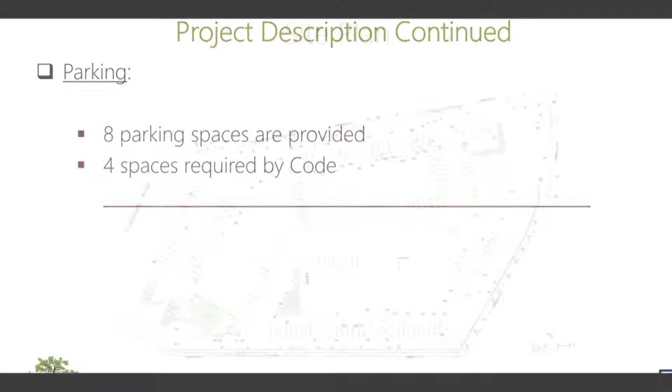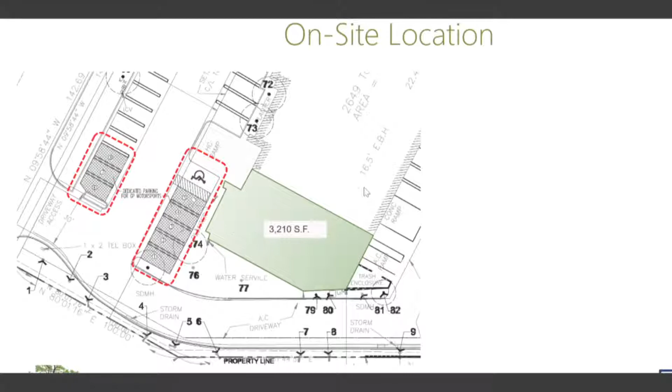Here is a view of the site plan, and this would be their building right here. Here's a closer location on site — you see the building, the tenant space, along with the 8 parking spaces. Here's a tenant floor plan.

So this is a special use permit for the wholesaling of auto sales, storage, including ancillary retail sales, as mentioned. It does require Planning Commission approval in the M1 zone. Generally, the Planning Commission must determine that the proposed use is not in conflict with surrounding properties and uses.

Planning Commission, your role is to basically make the 5 findings as follows: the project is consistent with the Thousand Oaks General Plan; the project complies with all applicable laws, regulations, and policies, including the Thousand Oaks Municipal Code; the project will not be detrimental to public health, safety, or general welfare; the project has been reviewed in conformance with CEQA; and the proposed use at the proposed location will be compatible with the land uses in the nearby vicinity.

In order to evaluate, I want to mention that the project site is zoned M1, industrial park, which allows for automobile storage and sales, subject to the approval of a special use permit. The proposal meets and will comply with all applicable laws, regulations, and policies, including the Thousand Oaks Municipal Code, as part of this and the building permit process if it's allowed to go through.

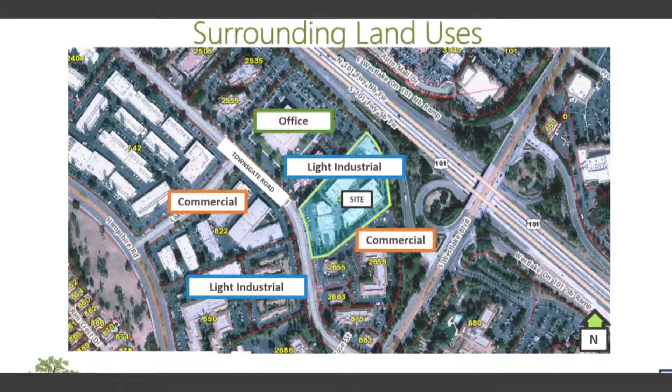Recommendation is as follows: staff recommends the Planning Commission approve SUP 2020-70685 based on the findings and subject to the suggested conditions contained in the attached resolution. That concludes the presentation.

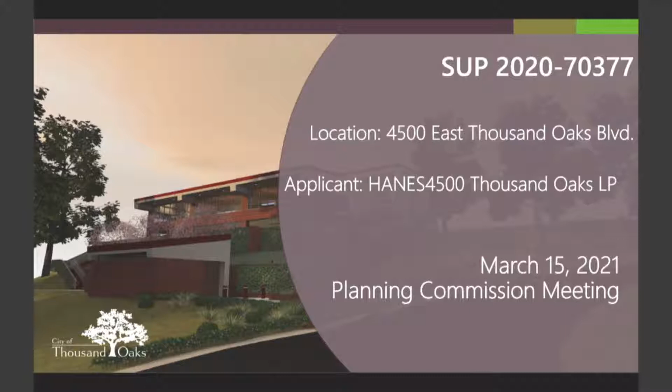Thank you, Chair Buss, members of the Planning Commission, members of the public. So the project is for a special use permit located at 4500 East Thousand Oaks Boulevard. It's in order to construct a new 2-story, 10,000 square foot office building that'll encroach into slopes of 25% or greater. As staff had already mentioned, the project also includes the land division to divide a single existing lot into 2 different lots, remove 1 protected oak tree, relocate 1 protected oak tree, encroach into the protected zone, and allow the pruning of 9 different oak trees, as well as new retaining walls, the associated parking for the development, grading, hardscaping, and landscaping. This project is coming before the Planning Commission for 3 different reasons. One, it's office uses. They are allowed within the M1 zone. However, they are subject to approval of a special use permit by the Planning Commission.

The project is proposing grading within natural sloping terrain that has 25% or greater gradients. And the final one is the project is proposing to remove a non-exempt oak tree that has a diameter of 24 inches or greater.

So here you can actually see the site. The project is about halfway between Thousand Oaks Boulevard and Lakeview Canyon Drive along Via Merida. Here you can see this is the existing site, currently developed with an existing single-story office building with a shared driveway and parking lot.

And here you can kind of see this is the project site, again, with some of the surrounding uses. Of note is that this project site, existing is an office building, and it is surrounded entirely by other office buildings to the north, south, east, and west. Also, this site is part of a larger office industrial complex, which goes up to East Thousand Oaks Boulevard.

So everything that you can see up here, this is all part of a larger office park that was approved in 1988 by the Planning Commission. So as part of that '88 approval, the Planning Commission approved removal of oak trees, encroachments into oak trees, pruning of oak trees, as well as encroachments into slopes of 25% or greater gradient.

Additionally, the applicant in 2020 submitted a pre-application for the project. And then in July of the same year, the applicant submitted the current project that's before you.

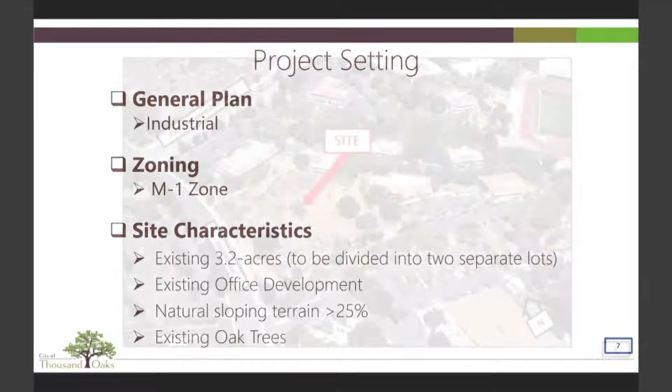And here you can see the site in its greater context with an oblique view. The existing parcel is approximately right here with that building. You can see the existing office development with Thousand Oaks Boulevard over here and Lakeview Canyon Drive just off the screen.

Going into the project details a little bit more in depth, this project is a new 10,000 square foot two-story building. It's a podium-style building with parking on the bottom floor, with the actual office space located directly above it. The parking level is going to have 40 vehicle parking spaces, and the building itself is going to be 35 feet tall.

There is going to be encroachment into 25% slopes or greater, not only for the building, but also for a new pedestrian pathway that'll connect from Via Merida to the existing building and beyond. I'll be able to show you that pedestrian pathway soon. There's also going to be a detached trash enclosure, which has been reviewed and approved by the trash hauler, and other associated landscaping, hardscaping, retaining walls, and utilities associated with that development.

The third application for this project is for a land division, in order to divide that existing 3.2 acre lot into two legal lots. This project, proposed tonight, is going to be on parcel 8B, the smaller of the two parcels, and it's the one closest to Via Merida.

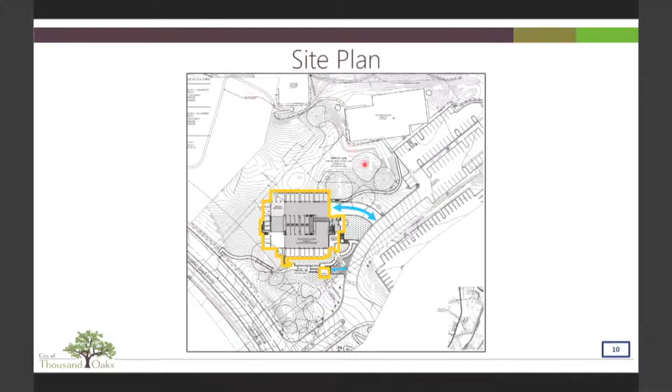In terms of the slope, the proposed project is going to be encroaching into gradients of 25% or greater of the proposed parcel area. Over 35,000 square feet of grading will have to occur - that's going to be the area itself. Of that graded area, just over 16,000 square feet is going to be within locations that have a slope of 25% or more. So less than half of the area is going to have slopes of 25%.

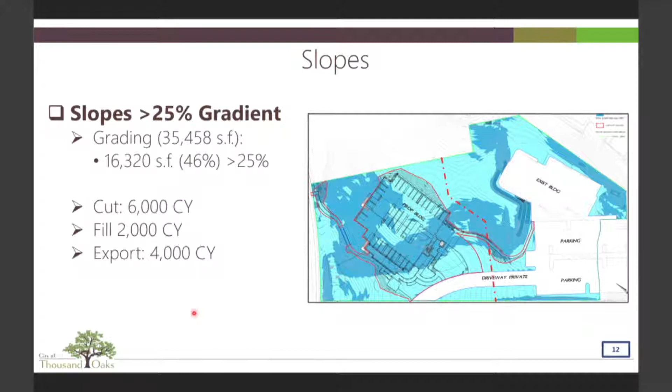Now, looking at this project and comparing it to the city's grading ordinance, since it is encroaching into those 25% slopes, staff was looking at whether there are ways to potentially minimize those encroachments. However, after reviewing the plans, reviewing the site characteristics, and in conversations with the applicant team, it does appear that the project was designed to minimize the amount of grading within those slopes of 25% or more. That is because of where the location is - it's in order to help also preserve the existing mature oak trees that are on the site itself, because if you were to locate it in other locations of the site, it'd be impacting more oak trees.

Additionally, that building is integrated into the slope. So effectively, they're taking kind of a cookie cutter, putting it down into the slope and carving it out. So they're trying to limit the amount of grading across the rest of the site.

The building itself is not visible from Thousand Oaks Boulevard because there's going to be some natural terrain features directly to the north of it that are going to be shielding it. And then you're also going to have other existing oak trees from the south that are going to be blocking it that way. And then also all the manufactured slopes that are proposed, they're at a maximum gradient of a 2-to-1 gradient - that is what's allowed per the city's grading ordinance.

Additionally, just looking at this project site, it's not identified as a prominent landform or ridgeline as identified in the city's conservation element or any of the updates from there. Also, it's not part of a larger existing or even proposed open space system according to the open space element. That's really because this kind of hill area within this office complex is isolated - there's no opportunities for it to actually connect to that larger open space network. There's pure urban development to the north, south, east, and west of this location.

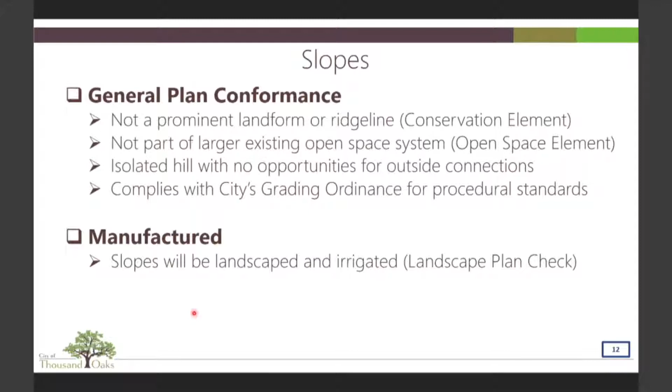Additionally, the project does comply with the city's grading ordinance in terms of those procedural standards. Also, the manufactured slopes are required to be landscaped and irrigated according to the city's grading ordinance. And all of that will also be checked not only during the city's public works review of the grading permit, but also during the landscape plan check.

In terms of the protected trees, there are 28 existing oak trees on site. That's not counting the other non-protected trees.

Originally, in the applicant's oak tree report, they identified 3 oak trees that are going to be removed. After reviewing it and having a conversation with the city arborist, it was identified that only one protected oak tree qualifies to go before the city, that's number 2707. Only one oak tree triggers a planning commission review. It has a diameter of 24 inches, and the city arborist found it was warranted to remove that tree because it is in declining health. It had a health grade of D, appearance of D, and they identified extensive dieback due to twig and leaf failure.

There's also one oak tree that's going to be transplanted, which you can see here down in purple next to the proposed trash enclosure. It's about 2 inches in diameter, so it does meet the city's threshold for an ordinance, but it's of a size that the city's consultant arborist identified it could potentially be successfully transplanted elsewhere on the site. So staff did get that confirmation.

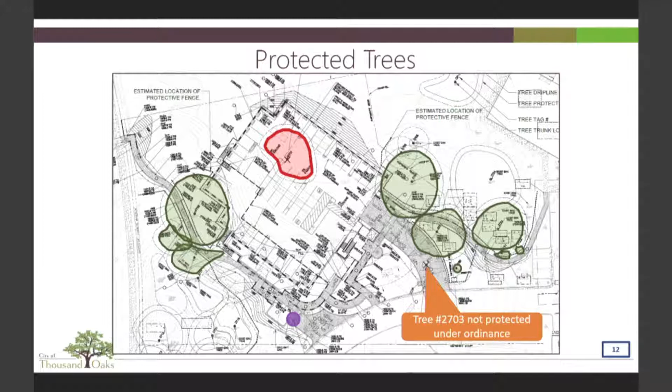Then that third tree I mentioned, it's number 2703. It's in the middle of the vehicle driveway. It's not of a size that it would actually be protected by the city's oak tree ordinance itself. It's smaller than that, so the city wouldn't even have say over that particular tree.

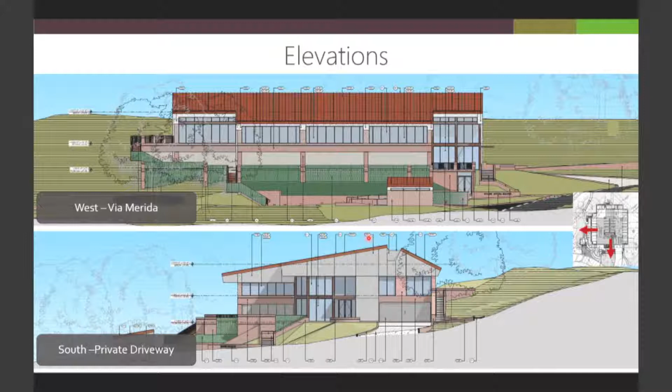Now, moving on to the actual building itself. Here we have the elevation, these are just the strict drawings. The top two are the most prominent locations and elevations you would be seeing, from Via Merida and the southern view, which is that private driveway. As you can see in the parking area, this is the parking level, and here's the podium with the office space built on top of that. The parking itself is going to be screened from view by landscape screens installed along the building itself.

Then we have the other two elevations. Really of note for this east elevation, this one faces into that existing building on the site. You're not going to see this down here, it's actually a concrete wall with earth on the other side, but it's just drawn this way. The bottom one is what's facing the existing elevation and hill to the north, and the other office park.

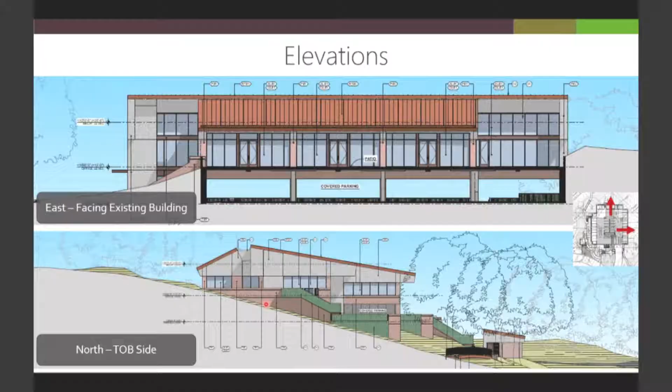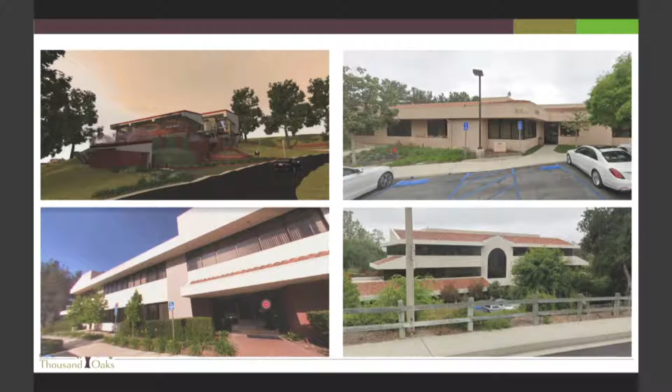In terms of the architectural design, the proposed structure does pull a lot of influence from the existing uses and buildings on site. The current office park has 1, 2, and 3-story buildings. This building fits the character of the greater office park because there are slight variations in architectural style throughout, but they all have a cohesive look. This project takes some of those cohesive elements but still modernizes them.

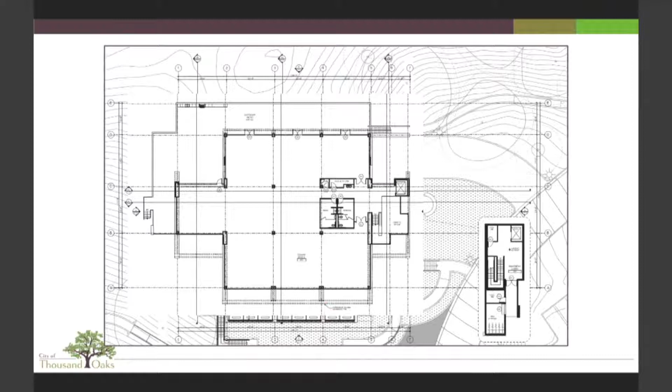In terms of the parking, the proposed project will only require 34 parking spaces per code. However, the applicant is proposing to install 40 parking spaces with that bicycle room.

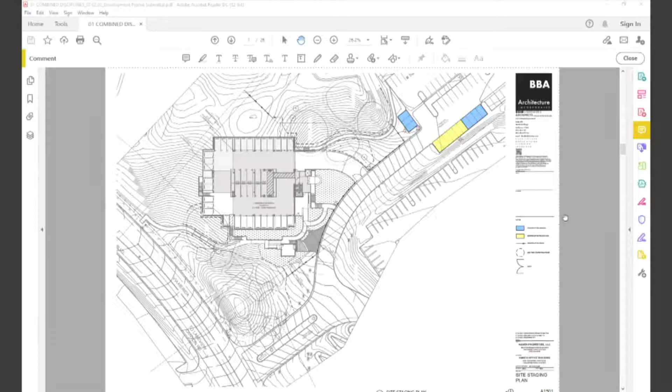This is a very preliminary staging plan for construction, identifying off-site parking as well. We do expect there's going to be some staging on site as they're doing the construction, grading activities, and other construction. But in terms of other parking or materials, this is the start for this project as it's submitted to Public Works, Building and Safety, and Planning for review. As Senior Planner Carlos mentioned, that's something we do take a look at. It's part of the submittal requirement, what the greater construction staging area is going to be for this project. So at the preliminary stages, this does suffice. It's really just to get the applicant to understand we're in a constrained area, and what the initial preliminary construction staging is going to look like. Then we can address that further as they're reviewing the project against codes and fully understanding the full extent of area needed for construction staging.

Okay, I didn't realize these are off-site. So these are essentially set-asides off-site. Effectively, and I say off-site only because this parcel will eventually be split in two, which is why we're doing the land division. Right now they'd be considered on-site since it's one parcel. But if the Planning Commission were to approve the land division and it were recorded with the county tomorrow, it would technically be off-site, but still within that greater office park. One thing that allows that is the office park has reciprocal agreements between the different property owners.

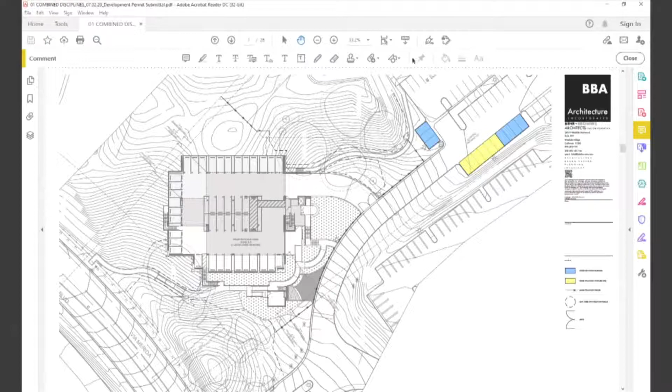My final question is regarding the bike storage room. In the plans, it appears there's storage for 5 bikes. The question is whether there's any set requirement for the number of bike parking spaces in new office construction projects. The city ordinance does not technically require bicycle parking. We use a rule of thumb of 10% of the parking spaces being provided. In this case they're providing 40 spaces, so that would require four bicycle parking spaces. They're providing 5 additional ones.

We do have Kathy Nome, a transportation engineer from Public Works. She'll be able to expand a little more on the bicycle parking requirements. But just so you're aware, the California Green Building Code does have a bicycle parking requirement, I believe 10% of all provided parking. You have to have bicycle parking equivalent to 10% of all provided parking, so it depends in that case. I'll defer to Kathy on the design of it.

Good evening, this is Kathy Nome, Commissioner Newman. I don't have a lot more to add except that we're really excited about how they're adding bicycle parking. They have a designated area, it looks like it's covered. As bicycle parking goes, you couldn't ask for a whole lot more. So we're really happy with what they're providing, and they're following the Green Building Code and the general rule of thumb, so we're good with it.

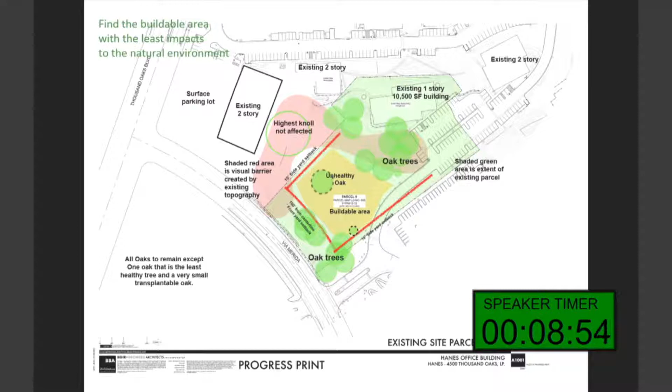The design of the building is pretty unique in that it literally fits into the hillside. We did that to accomplish something: to develop a building that uses sustainable principles and accommodates passive and active energy conservation strategies. So this building is designed to be an energy efficient building. There was a comment about the building being 20,000 square feet, but actually the parking is surface parking and the building sits above it. The yellow area is the office building, and what we did is we wanted to minimize the footprint of the development. By putting the office on top of the parking, we were able to do that.

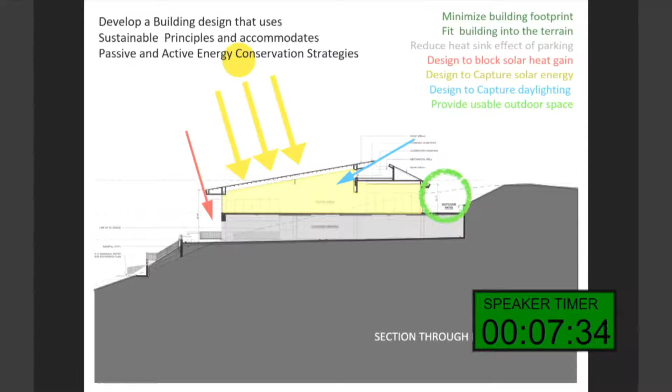We wanted to fit the building into the terrain. Because most of the parking is covered, we eliminate a lot of that heat sink effect that happens when you have parking lots exposed directly to the sun. We designed big overhangs so that we could block the heat gain into the building. We designed a roof that is a very shallow slope roof that allows us to capture solar energy. Even though we're not pointed directly south, we're still going to capture most of the day sunlight. We also designed a clerestory that will come into the hallway of the project, and we have north-facing glass that would also allow daylighting to come into the project. We wanted to make sure there was a lot of usable outdoor space. Next slide.

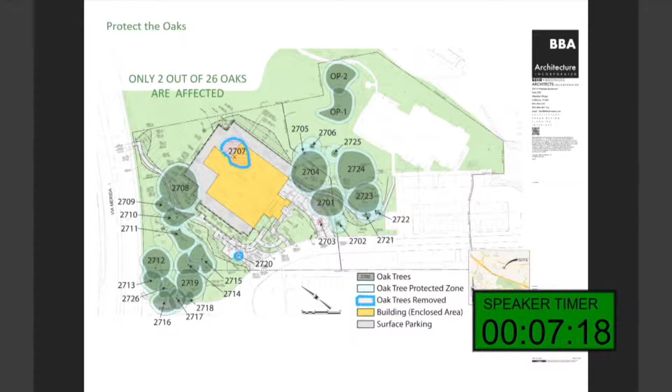So this exhibit is similar to the city, but I want to make clear the yellow area is actually the footprint of the office building up above. The gray is the footprint of the parking. The area directly behind the building is a patio. The two oak trees impacted are the large oak tree and the very small oak tree towards the front. The rest of the trees on the property are completely left outside of that.

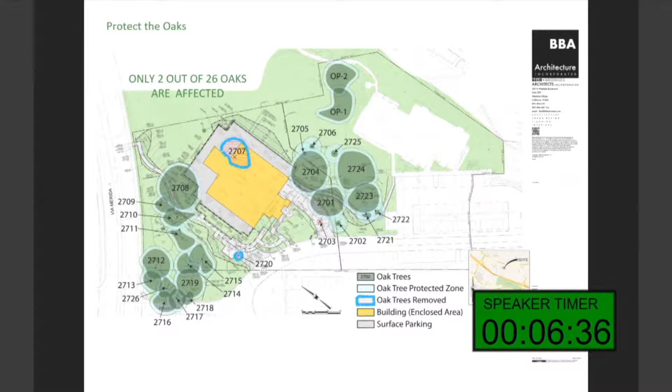With regards to the walkways, one thing we did was grade the elevation of the walkway so we're minimizing the amount we have to carve in, building it up where we can because the distance is so short, adding soil rather than digging a hole, trying to eliminate retaining walls there. That was the whole strategy. When we go under the trees, we don't want to create retaining walls.

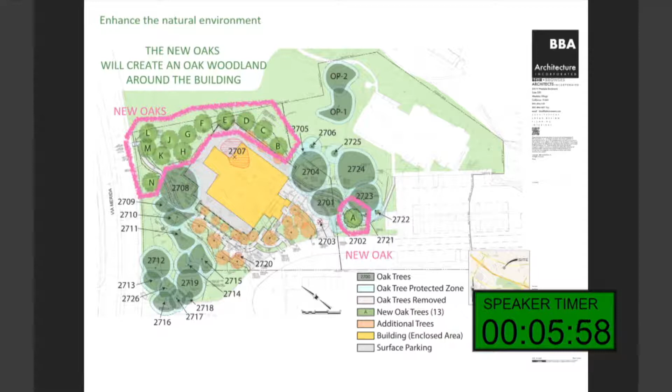So this is Bob's landscape plan that shows the trees. In addition to oak trees, we have other trees surrounding the property. In the end, this building would be completely surrounded by landscape.

I think it'll be the patio back here, it's a pretty large patio area. We actually have a terrace on the south side, the warmer side, that has fantastic views out towards the mountains. And this will be a much cooler area because it'll have the oak trees and the upper slope. We were also very careful not to put the building at the very top. It's actually below the top of the knoll back here because we didn't want to cut off the knoll. We didn't want to reduce that.

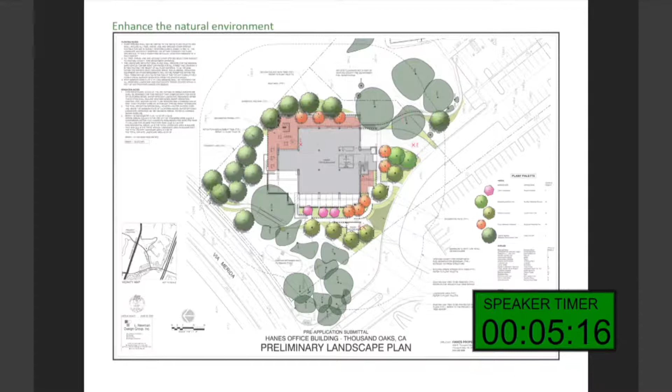It's already been pointed out that right now from the entry point, you probably won't be able to see the building. This green area shows where, in the future, as the oak trees get bigger, it'll just look like an oak woodland as you're driving by Via Merida.

These are actually existing oaks that are here. These are the new oaks on the left-hand side that are smaller. Eventually when these take over, they'll begin to create that kind of oak woodland effect.

We're also looking at, once we do the grading, trying to elevate parts of the walkway to remove it from impacting underneath the trees and eliminate, again, grading under the tree.

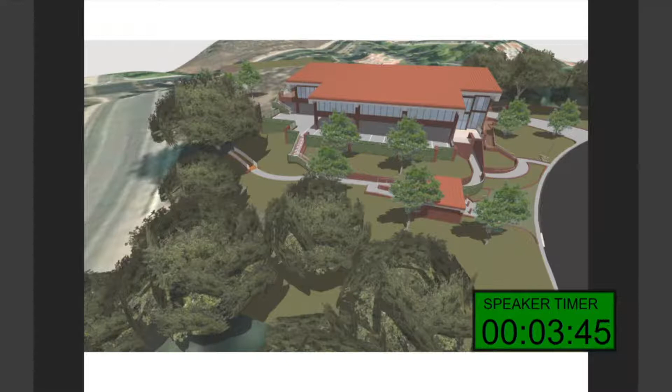So this is the view you would get as you go up the main driveway. The primary image is the main lobby. It's a 2-story lobby with a stair that goes up. But you can take this walkway around the front, and right behind here, you could enter the lobby of the elevator on the lower floor.

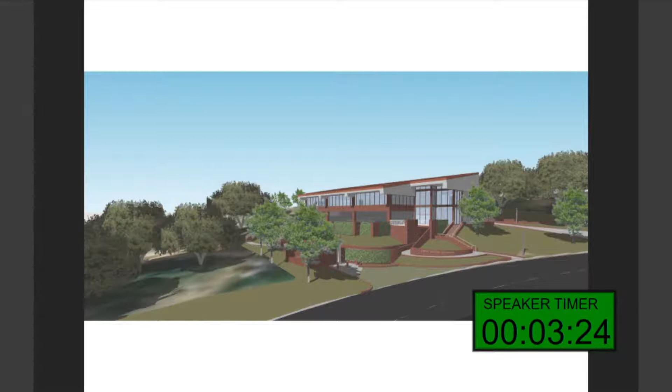This is the project, and we're really proud of it. We think it's a well thought out, sensitive building and a sensitive site plan. We hope that you feel the same way. Thank you very much.